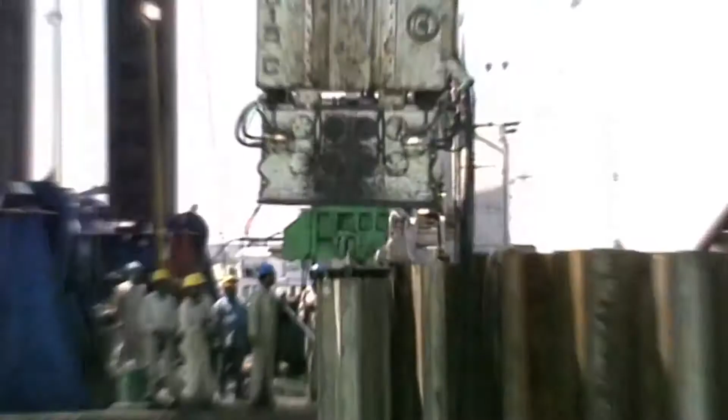Sheikh Mohammed bin Rashid Al Maktoum, Dubai's crown prince, is the visionary behind this amazing building. The project is his response to the economic time bomb his country confronts. As his close advisor, Sultan bin Sulayem knows all too well. He knew that we don't have oil. He knows that oil is going to end someday. And they have two choices: either go and do something about it and find other alternative ways to sustain the life for the people of Dubai, or sit waiting for help.

Only 50 years ago, Dubai was a dusty backwater, home to pearl divers, coastal traders and Bedouin. Then, in the 1960s, prospectors discover oil. The sudden injection of billions of petrodollars transforms the sheikhdom. But geologists predict the oil boom will be over by 2016. The good life could end just as quickly as it began, when the wells run dry.

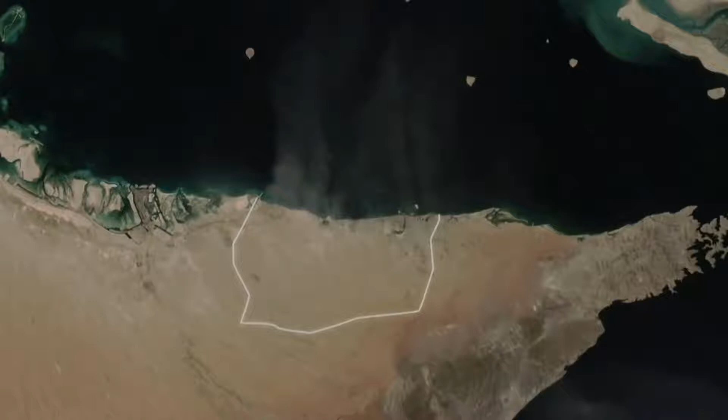The answer to Dubai's economic survival lies in its geography. This tiny emirate, less than twice the size of London, is in the remote Arabian Gulf. But Dubai has three untapped assets: sun, sand, and sea.

Facing future economic meltdown, Sheikh Mohammed makes a crucial decision. He will turn his country into one of the world's most exclusive holiday destinations, a playground for the rich on the Arabian Gulf Coast. The Sheikh needs a luxurious centerpiece to launch his country into high-end tourism. He stakes what some speculate is over $1 billion on the tallest, most lavish hotel in the world, with a unique 7-star reputation: the Burj Al Arab.

I think it was very important to put Dubai on the map of the world. There's no hotel like this hotel. It takes guts, and Sheikh Mohammed has a lot of guts.

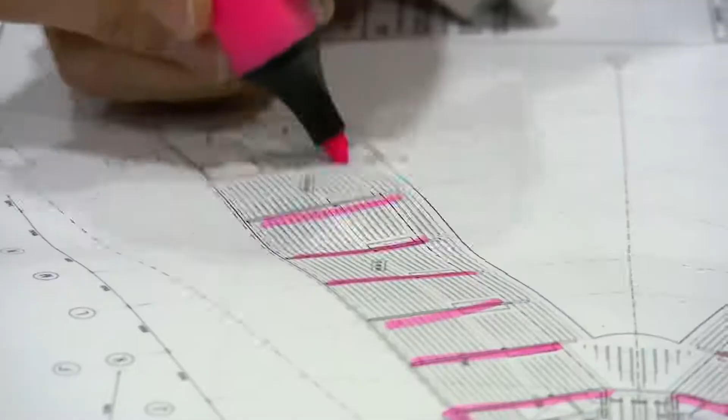The Sheikh's courage is clear from his choice of architects: a radical young team from Britain, brave enough to take up the challenge, but very short on experience. They are led by Chief Architect Tom Wright. We had an average age of 32, not a grey hair between us, and none of us had gone over about 15 stories. I was quite staggered by the scale and the immensity of the project. Tom Wright and his colleagues have a reputation for innovative engineering, but they're more used to designing schools and offices.

But Dubai is a place where connections can make all the difference. Through a contact in the ruler's office, the team gets its break. Sheikh Mohammed agrees to a meeting and is so impressed with their initial concepts, he awards them the contract.

Now Wright must turn his sketches into a design so remarkable, the building becomes a world-renowned landmark. We had many sleepless nights worrying that the building we'd designed wouldn't turn out to be at all iconic. Wright knows he must push his design to the limits. A building only becomes an icon when its form is simple but unique.

We decided that if you could draw a building simply with a few strokes of a pen, and it was instantly recognizable as not only the building, but the place - Dubai, in this case - you'd created something that was iconic. So if you consider these buildings in the world, there are probably no more than 10 maximum that have actually achieved this status: Australia, Sydney Opera House. As with all these buildings, it's usually just the first couple of lines that actually make you know exactly where the building is. Paris - and you have to put a flag on the top.

Can Tom Wright and his team compete with the likes of Gustav Eiffel? This is a once-in-a-lifetime challenge. All the brainstorming pays off when Wright finally has his eureka moment. We were sitting there having a beer, watching the modern sailing yacht come out of the Dubai Offshore Sailing Club. You think of excitement, you think of exhilaration, and we went, hey, this must be the one.

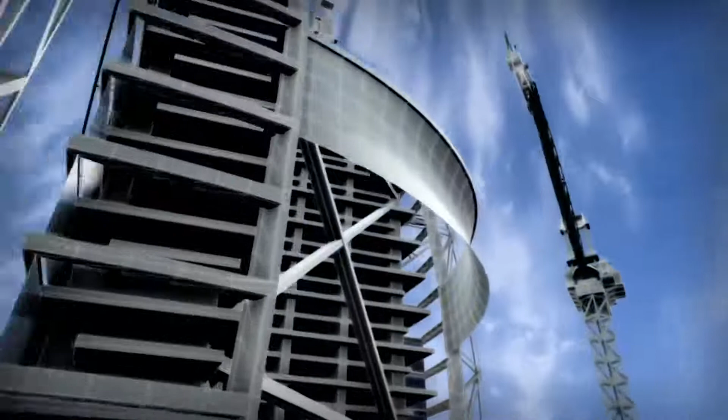Constructing the hotel out at sea will significantly add to the risk and cost. Can Wright persuade his colleagues this radical scheme will work?

I remember I was pulling the sail out to sea, and the rest of the design team were pulling the sail back onto the shore, and this continued to go backwards and forwards before finally the client stepped in and said, no, it's going to be out at sea.

Sheikh Mohammed is prepared to take the risk. The hotel will be built 270 meters off the coast. No one has ever built a skyscraper this high on an artificial island. This 321-meter structure, weighing 250,000 tons, will need to stand firm against earthquakes and Gulf storms.

Wright has won the first of many battles. The Burj will rise out of the sea. But time and again, his refusal to compromise will force his colleagues to push the boundaries of engineering to the limit.

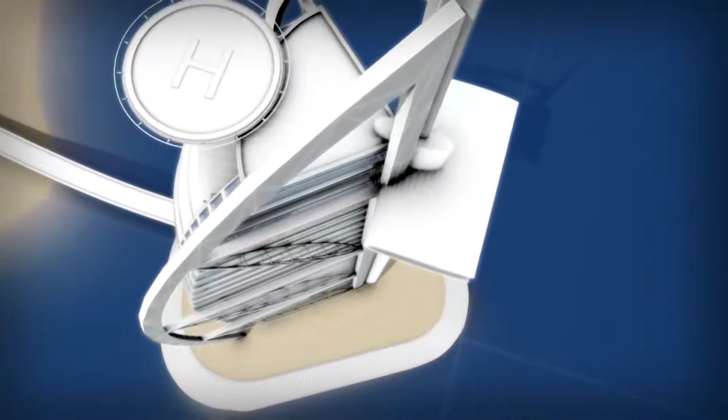By early 1995, the construction team is hard at work on Phase 1, building a low-lying island. But the inexperienced architects are about to get a taste of Dubai's extreme weather.

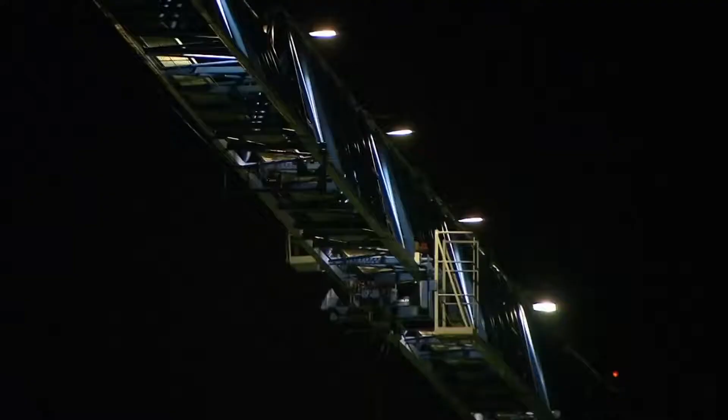April the 27th, a powerful storm known as a shamal sweeps across the Gulf, hitting the coast with a vengeance. A set of construction barges lie in its path. Each is laden with 10,000 tons of rock.

The architects have planned for all weather conditions, but the storm's intensity still shocks Simon Crisp. We had 3 or 4 meter waves bashing onto the beach. To see the waves coming in like this was really quite a wake-up call for us.

One huge barge breaks loose and slams into the mainland. The team realizes the damage this kind of storm could inflict on their island hotel. We had a really graphic example of how powerful the Gulf of Arabia can be when it's angry. The architects' decision to expose their structure to these forces could have serious consequences. The engineers will have to struggle to produce a low-lying island capable of resisting nature's fury.

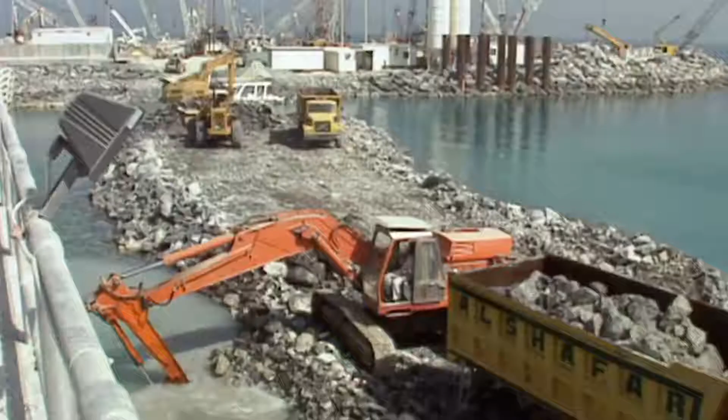The man-made island for the world's tallest hotel has hit a critical stage just 5 months into the build. Dubai's Sheikh Mohammed is depending on this project, the Burj Al Arab, to convert his country from oil producer to top-class tourist destination.

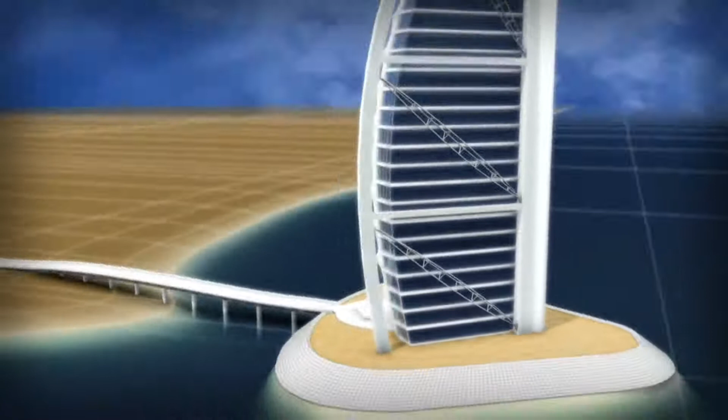But a debate rages over the island's height. Architect Tom Wright wants to make it low to give the impression of a sail rising out of the water. We argued a lot about the height of the island. From a design point of view, I wanted people to be close to the sea.

From the start, he's gone head-to-head with engineer Mike McNicholas, who's responsible for the island's safety. So I wanted the island as low as you possibly could, you know, skimming the sea. I'm coming from the other end, needed to make sure we were protecting the island.

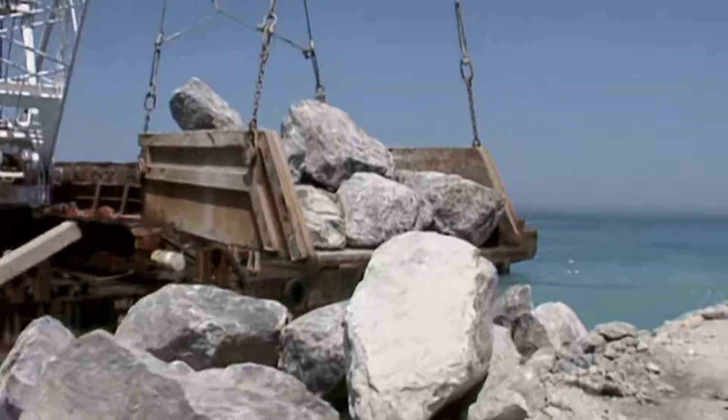McNicholas's worst fear is that waves breaking over the island could damage the hotel or even drag guests into the sea. Initially, the engineers planned to build the island using rocks. They are available locally and the technology is proven. But Wright rejects this. A rock island would have to be far too large to repel the sea safely.

To keep the island low, McNicholas experiments with pioneering concrete blocks designed to reduce the impact of waves. But no one in the Gulf has ever used these blocks before. I had to insist with the team that we carried out tank testing. It was the only way we were going to be sure that the island would be safe.

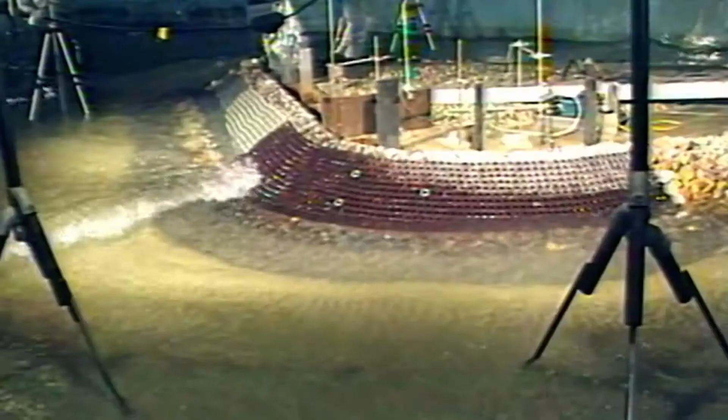These tests replicate the power of the tallest waves that can occur once in 100 years and sends them crashing into a series of differently configured models. 3 weeks of testing prove the hollow blocks will work.

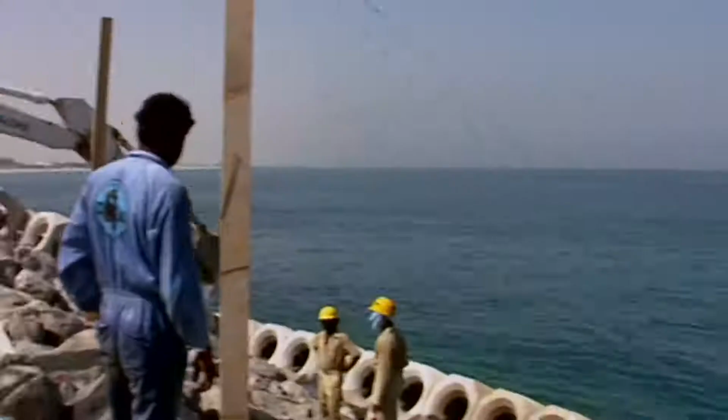The construction team builds the island with steep rock slopes, then covers them in concrete armor to absorb the force of the waves. These ingenious blocks work like a sponge. As the wave hits, the water passes inside the space and turns around on itself. The force is largely dissipated.

With the engineers' help, architect Tom Wright has won his battle for a secure island that rises only 7.5 meters above the waves. Now the team begins the second stage of construction.

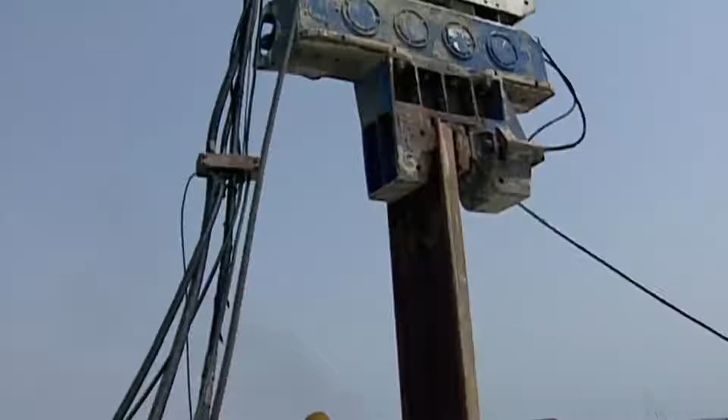In the center of the island, construction workers drive huge lengths of steel 20 meters into the ground. This creates a triangular steel wall known as a cofferdam, which will become the outside of the hotel basement once they excavate the sand from inside.

But removing the sand could be dangerous. That was a real challenge for us. It's sleepless days and nights, 7 days a week, working out how we were going to stop the seawater coming into the structure, how we were going to stop the seawater coming around our structure from beneath and flooding it.

The weight of the sea is a huge force on its bed. This pressure forces water through the sand and threatens to flood the artificial island from beneath.

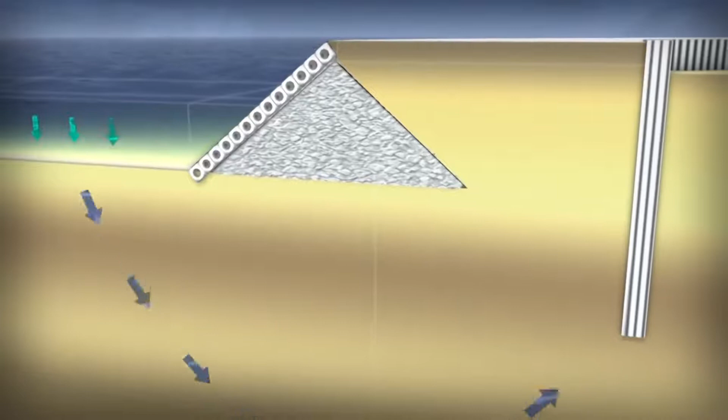To keep the sea out, McNicholas injects liquid cement into the sand to seal off his steel wall from below. But as the sand is removed to form the basement, there's less and less weight to hold back the force of the sea. The cement seal is going to be tested to the limit.

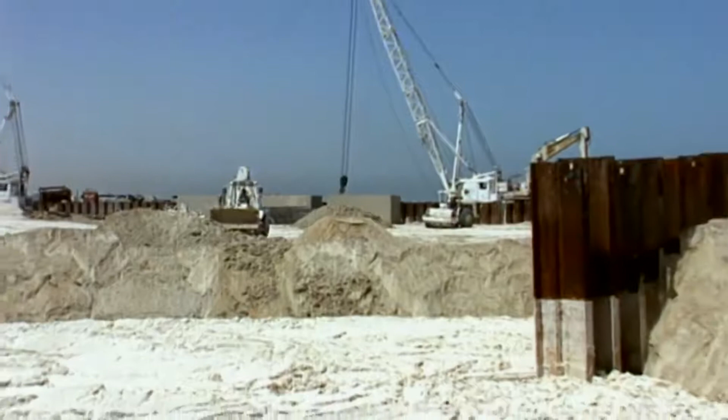In the worst case, the pressure caused by that water movement could have blown the whole bottom of the excavation like a champagne cork.

If McNicholas's calculations are wrong, the excavation could be swamped, killing hundreds of workers. But he stands by his design. With the cement seal in place, the excavators begin to remove the sand.

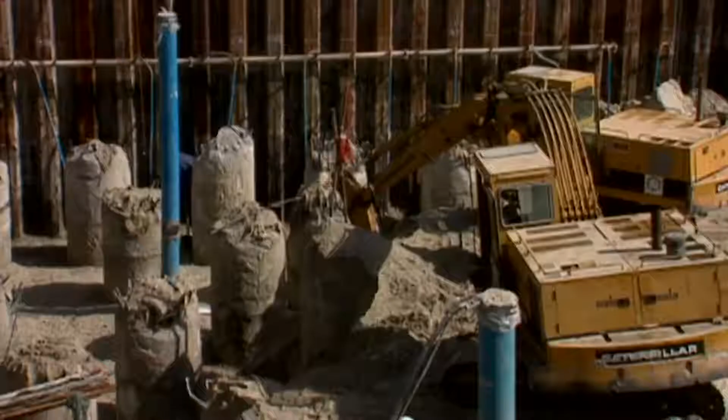As the man responsible, he's not going to let the workers face the risk alone. I felt I had to be one of the first guys down at the bottom of the excavation, looking up 10 meters above myself, thinking, each side of this cofferdam is 7,500 tons of sea pressure pushing in.

When put to the test, both wall and seal hold firm. One of the probably proudest moments of my career was being stood on that excavation and looking around and seeing the steel wall there surrounding me and thinking, we are holding back the sea. My design worked.

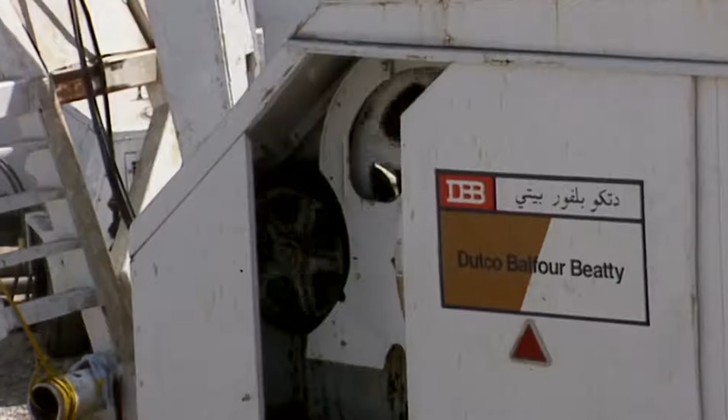November 1995. The artificial island for the tallest all-suite hotel in the world is now complete. The construction team starts phase 3 of this one-off project, the foundations. The support needed for any skyscraper is vast.

But the location of the Burj Al Arab presents an added challenge. It had never been done before to build something like this on reclaimed land. We're talking about a 300-metre high tower on a man-made island in 6 metres of the Arabian Gulf.

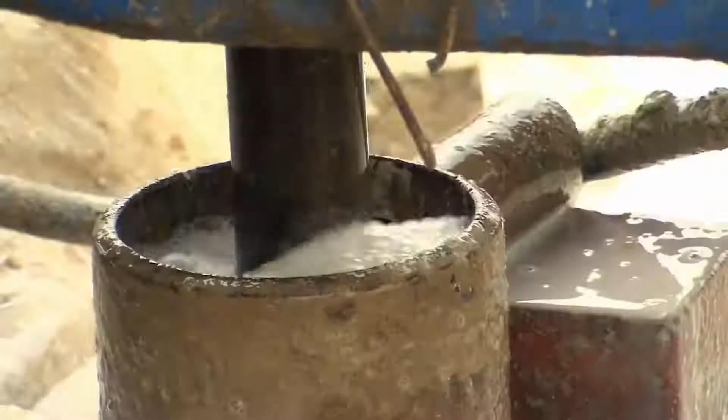The problems multiply when the results of earlier core tests reveal bad news. The team searching for bedrock drilled deep into the seabed, but even a full 180 meters down, there was no solid rock. This will make their job tougher, but the architects remain defiant.

The average person would think we're crazy to build something like this on sand, let alone out in the water. How will this 300-meter structure stand firm against earthquakes and winds of close to 150 kilometers an hour when its foundations depend on nothing more substantial than sand?

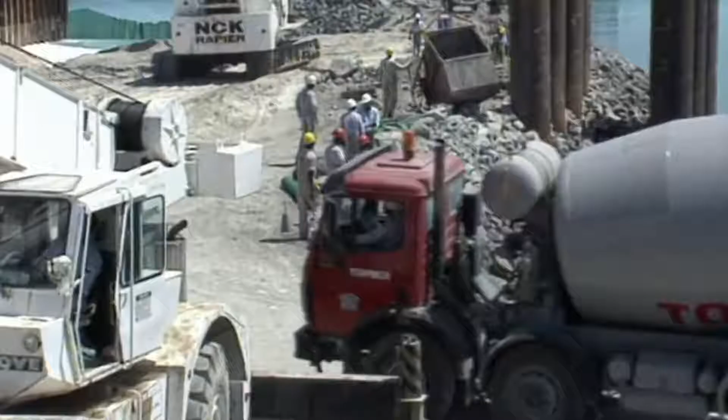On an artificial island 280 meters off the coast of Dubai, construction workers are preparing the ground for the tallest hotel in the world, the Burj Al Arab. But there's no bedrock beneath the site to support the foundations for a skyscraper.

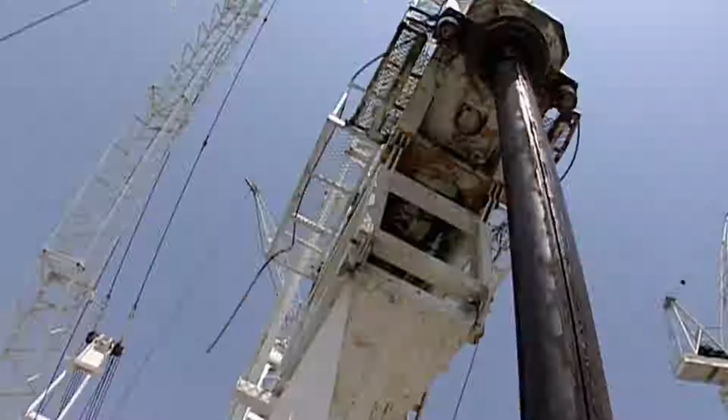The architects have a plan. They want to support the Burj using steel-reinforced concrete foundation piles drilled deep into the sand. So what's to stop the whole structure from just sinking? They are relying on an effect known as skin friction, the resistance that stops two rough surfaces slipping past each other.

Skin friction is all about the contact between the sand and the surface of the pile, and the longer the pile, the further in the ground it is, the greater that effect. I'm going to demonstrate it now by whacking it in. You'll see it starts to move quite quickly with the first few impacts. Now it's starting to stiffen up a bit, even though I'm not hitting it any harder or softer, and the skin effect is starting to really kick in here.

Once the friction between the post and the sand around it equals the load of the hammer, the post comes to a halt.

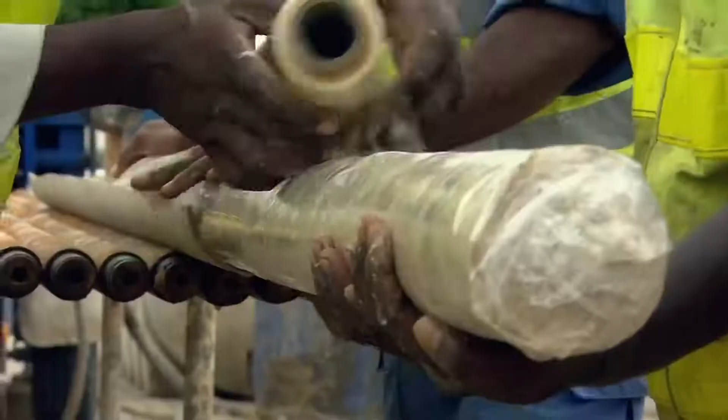The scheme will only anchor the Burj if the sand is compacted enough to create resistance around the building's piles. The drillers pack sand samples into sealed containers and send them off to be analyzed. If the results show the sand is too loose, then support on the piles anchoring the building could suddenly fail.

The geography of Dubai gives everyone reason for concern. It lies within range of a major fault line, so this soaring megastructure could be vulnerable to earthquakes.

In June 1964, a 7.5 magnitude earthquake hits Niigata in northern Japan. Because the area is built on sandy silt, the tremors flip over entire apartment buildings.

This isn't normal earthquake collapse. It's a devastating phenomenon known as liquefaction. As grains of loose sand shake, they fill up any air pockets and compact, taking up less space. The ground stops behaving like solid earth and acts like a liquid. On shifting sand, any building could simply topple.

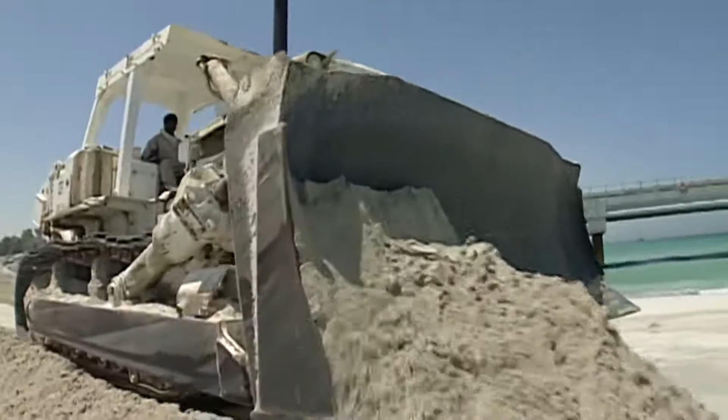When the results of the drilling tests return, it's good news. Deep beneath the site, they find compacted and calcified sand. Liquefaction is not a threat. But will the foundations be long enough for the skin friction to hold them firm? We weren't going to take any chances, and we extended the piles by another 8 meters.

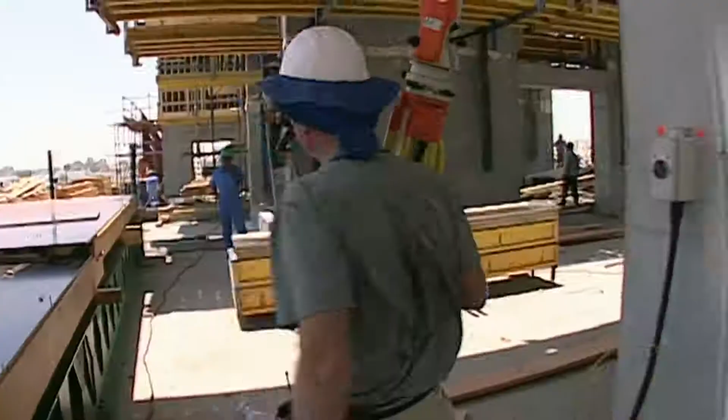One by one, the engineers are solving the challenges thrown up by this extraordinary structure. But in 1996, they brace themselves for a new set of obstacles as Phase 4, the construction of the hotel itself, begins.

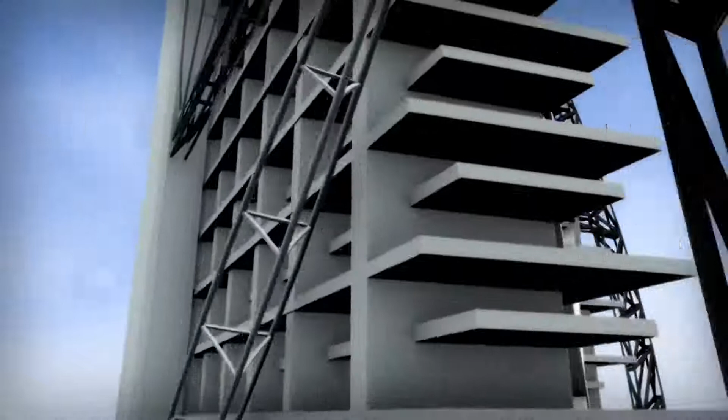This building had to stand up to the worst that the Gulf could throw at it. The hotel itself has slender concrete walls, not capable of withstanding the elements alone. To hold them firm against high winds and earthquakes, the architect devises a visually stunning solution: a gigantic steel structure outside the main building, known as an exoskeleton. A series of vast diagonal trusses tie two huge steel bows to the concrete core at the back of the building.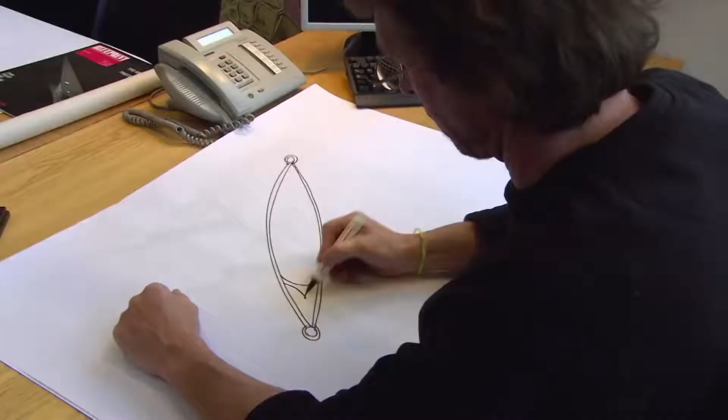Wright's design will make the building unique. But his giant diagonal trusses will make life hell for Anthony McCarter, the engineer who has to make them work. Those trusses gave me 4 months of heartache, sleepless nights, worries, anxiety. They must be incredibly strong to tie the exoskeleton together. But aesthetics are just as vital. It was critical that these diagonals were very, very elegant and also very beautiful as they're so visible.

This building has to wow the world and make Dubai a must-stop destination. Wright's not about to compromise. I used to go to Tom with option after option. I remember one particular occasion where I had 7 options and he went, no, no, no, no good, no good, no good.

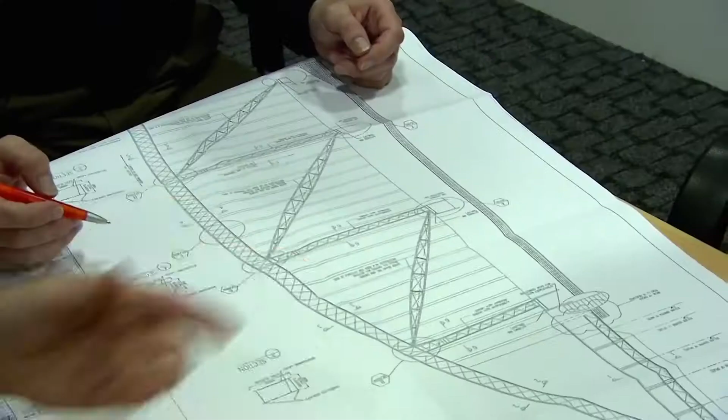Eventually, McCarter finds a form that works structurally and is graceful enough to fit Wright's vision. But this in turn causes nightmares for Malcolm Murphy, the chief contractor. It's okay for the architect to draw pretty pictures, but we have to build it.

He finds a factory just 15 kilometers from the construction site capable of welding the huge diagonals. Each one is longer than the Airbus A380 Super Jumbo and heavier than 20 double-decker buses. Welding these complex forms in the factory is the easy part. Transporting them to the site is not. With each truss weighing in at 165 tons and reaching a staggering 85 meters in length, it's no easy task.

And the challenge is to do that. It's just unbelievable. No one has ever transported anything this size before in Dubai. But Murphy's not going to be beaten. He brings in one of the world's largest heavy lift transporters, a beast with a total of 80 wheels. It makes the slow journey to the construction site at an average speed of around 6 kilometers an hour. Police must close roads and remove traffic lights to allow this convoy through.

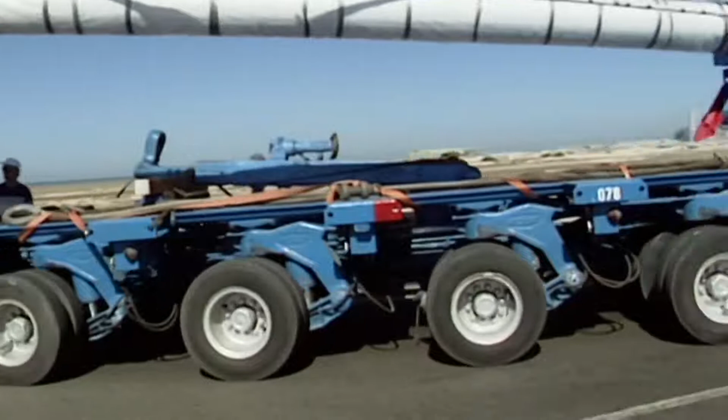When they finally reach the site, the contractors face their next hurdle. These 165-ton beasts have to be lifted into position. The architect refuses point blank to position these things in 3 pieces, which we wanted to do originally. And he said, no, aesthetics, I'll not let you weld up there.

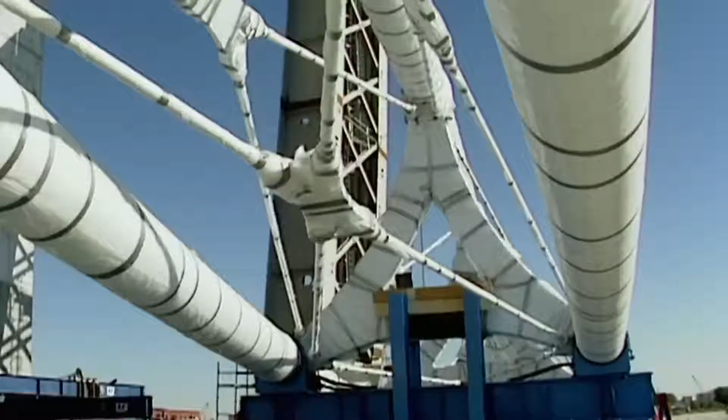He has to find a way to lift the trusses in a single piece to a height of almost 200 meters, twice the height of the Statue of Liberty. We had to go away and think of an idea how to actually lift these monsters up. We had 3 big monster cranes in there, and even they weren't big enough to lift the diagonal trusses.

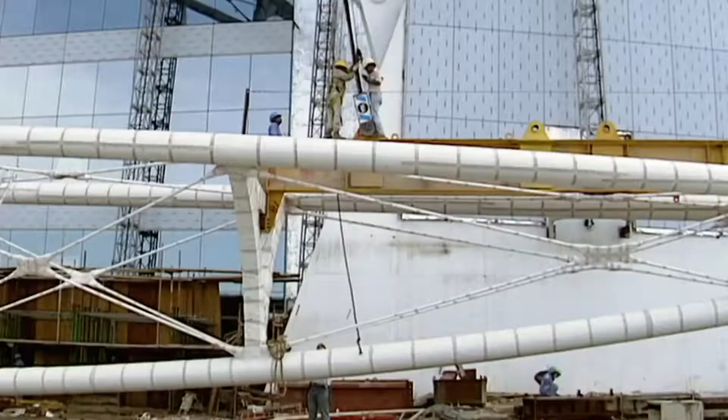Murphy must look further afield for a solution and brings in specialist lifting gear from Singapore. His team sets up winches, like those used on offshore drilling rigs, high on cantilever frames 15 meters from the building. Cables with a breaking strength of 225 tons are attached to the end of the truss. I can assure you we were very, very nervous that morning when we lifted the first one. 30, 40 guys had sleepless nights that week, getting ready for that first lift.

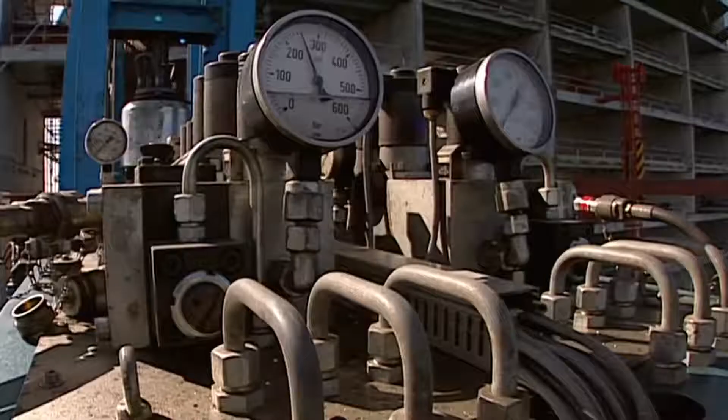The two massive winches take up the strain and painstakingly raise the diagonal truss little by little up the side of the building. It's all going to plan. Murphy and his team have solved the lifting dilemma, but these trusses have a sting in the tail. They need to fit into place with pinpoint accuracy.

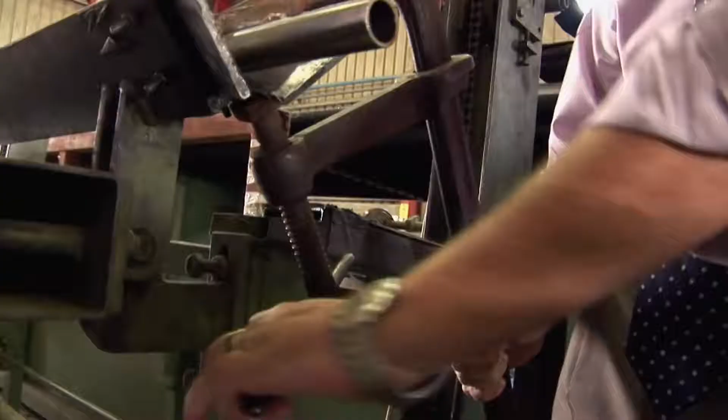But Dubai's climate means temperatures can vary by as much as 14 degrees in a single day, and this will make the trusses expand and contract dramatically. The problem's known as thermal expansion. The steelman's nightmare in the desert, working at 50 degrees C. Steel expands in the heat and contracts when cold.

Okay chaps, light up. We're actually going to heat the steel up now, which is going to give you an idea of what temperatures we're working in the desert. Heat makes the steel molecules move faster and further, and this 15-meter tube actually grows in length. The difference is visible. What did I tell you? Steel does expand with the heat.

The diagonal trusses on the Burj Al Arab could expand and contract by a full 5 centimeters over a 24-hour period. They will never fit their precise point in the framework without an ingenious solution.

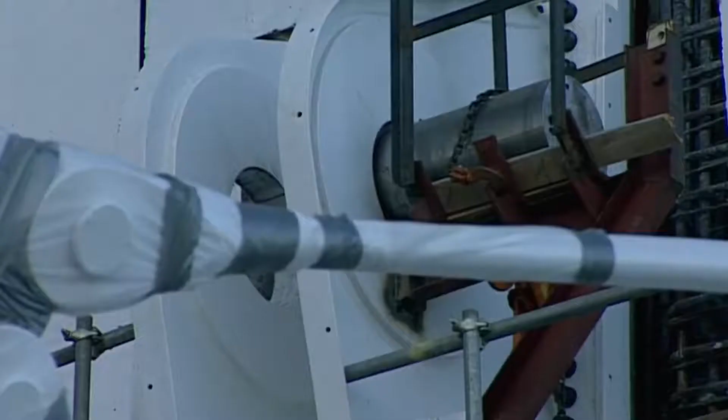The engineers thought about it, the structural fabricators, the steel fabricators, the architects—everybody thought about it, and it was actually one of the architects who came up with this great solution.

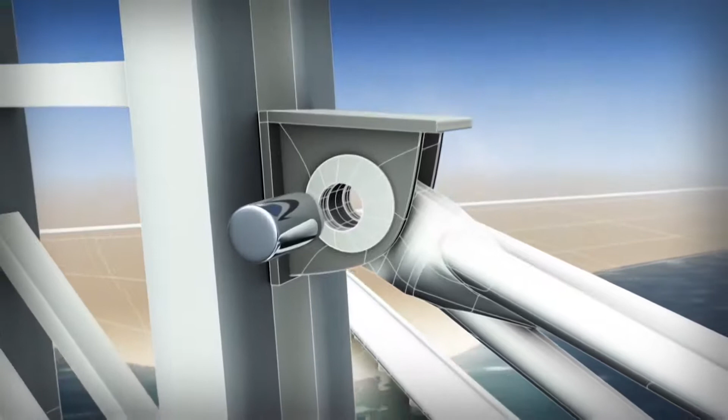On the frame of the structure, the fixing bracket contains a vast washer with its hole offset from the center. This swivels until it lines up with the hole in the diagonal truss. Then the cast steel pin, about 30 centimeters in diameter, is inserted through both holes, locking them together. This clever device buys the team the crucial 5 centimeters of play they require for the installation, and the truss is now fixed securely in place.

When we got that pin in, we had those champagne corks flying. It was just unbelievable. But there's precious little time for celebration—the first VIP guests will arrive before the millennium. This leaves the team less than 36 months to complete the entire project.

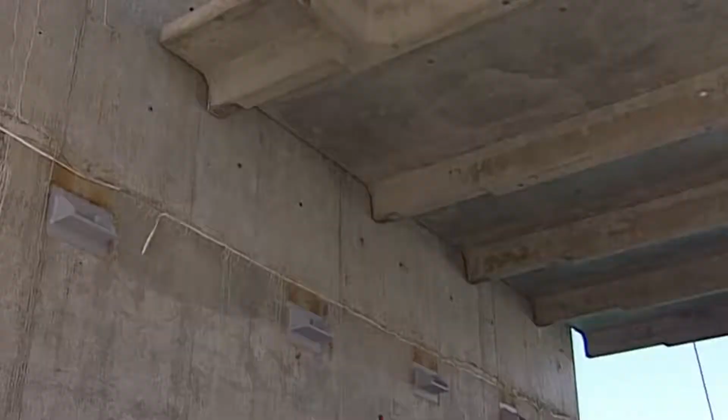Sheikh Mohammed's vision for the Burj Al Arab meant that it was needed yesterday.

January 1997. A colossus is emerging out of the Arabian Gulf. The Burj Al Arab is to be the tallest hotel in the world, the last word in luxury, and a proud symbol for Dubai.

Architect Tom Wright wants the building to be beautiful. The steel sections of the exoskeleton that will support it must be as minimal as possible.

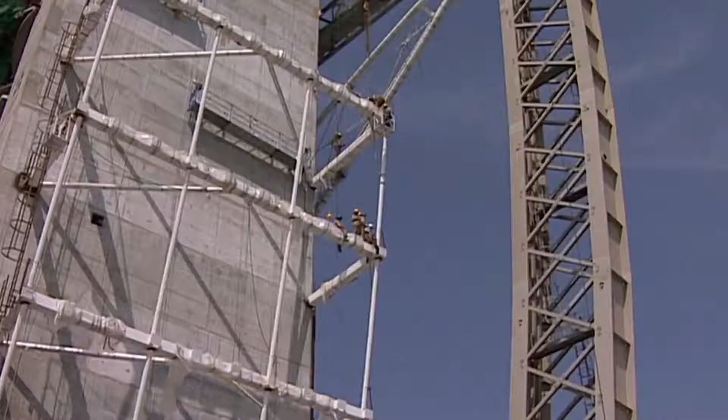The view from these $2,000 a night suites will have to live up to the price tag. When you're in the suite, looking through the windows, they are right in front of you, so they have to be exceptionally well detailed and well put together.

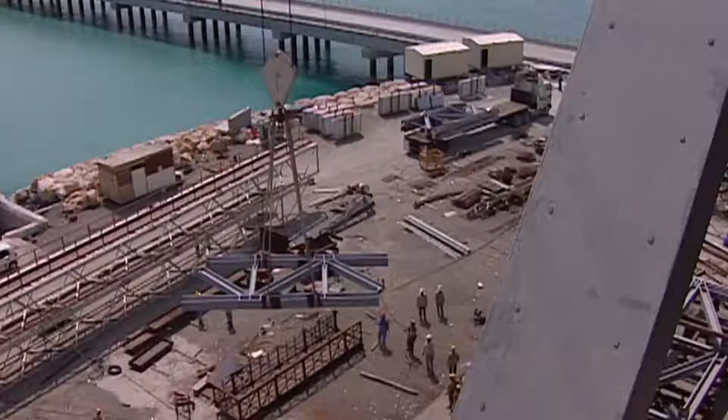But this creates a dilemma. If Wright makes the exoskeleton too light, the wind's force at 300 meters above the Gulf could shake the building apart. Too bulky, and the elegant form of his yacht-shaped structure is ruined. Once again, Wright and the engineers, who must make his hotel safe, are on a collision course.

When you're designing a building that is taller than the Eiffel Tower, and you've never done one before, you want to make sure that you've got it right. This structure is so unusual.

For the first time in Dubai's history, engineers decide to do tests in a wind tunnel. Wind engineer Volker Buttgereit knows the Burj Al Arab is one of a kind.

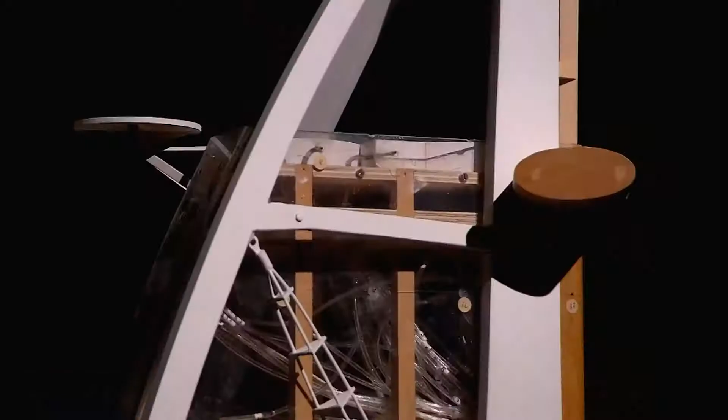Before this building came along, most of the buildings in the Gulf were fairly orthodox shape—square, rectangular, nowhere near this scale. So doing a wind tunnel test for a building in those days in the Gulf was almost outrageous. But for this extraordinary structure, it's essential.

The wind tunnel throws up results that could threaten the entire exoskeleton. When we first saw the design, there was immediate concern about vibration due to something called vortex shedding. Vortex shedding is an engineer's nightmare.

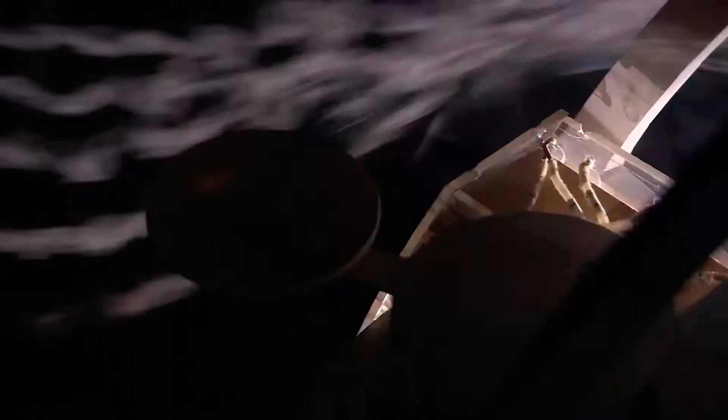Certain wind conditions blowing over sharp edges on the steel structure can create miniature tornadoes. These set up dangerous vibrations that can shake a building to destruction—which is exactly what happened to these massive cooling towers in Ferrybridge, Northern England, in 1965. The engineers must find a way to protect the Burj Al Arab.

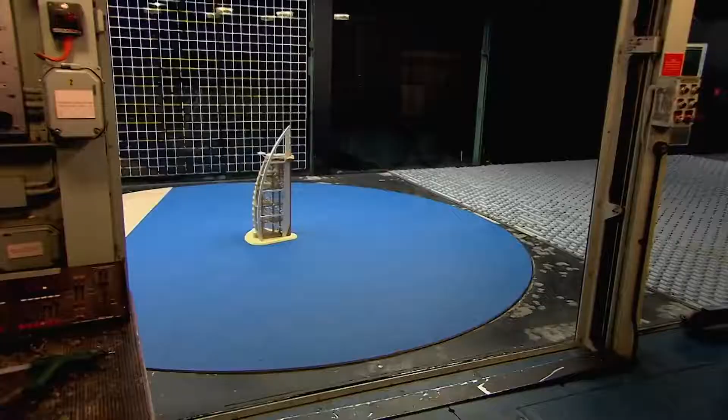The simplest solution is to change the aerodynamic shape, but that upsets the architect. The architectural idea of the exoskeleton structure is, when you look at it, the very essence of the building. If you take it off, it's just another building. If you put the exoskeleton structure on, you have an icon. The engineers need to think again.

This is classic vortex shedding. We realized we had to come up with something clever that was not visible, but somehow reduced the motion.

They turn to an ingenious hanging weight called a tuned mass damper. These are installed at vulnerable points in the exoskeleton. When the wind blows and vortex shedding starts to create dangerous vibrations, the 5-ton weight will swing instead of the structure and damp down the vibrations to well within safety limits.

11 of these systems are fitted from the top of the 60-meter mast all the way down through each of the steel bow structures. These dampers safely cancel out the threat.

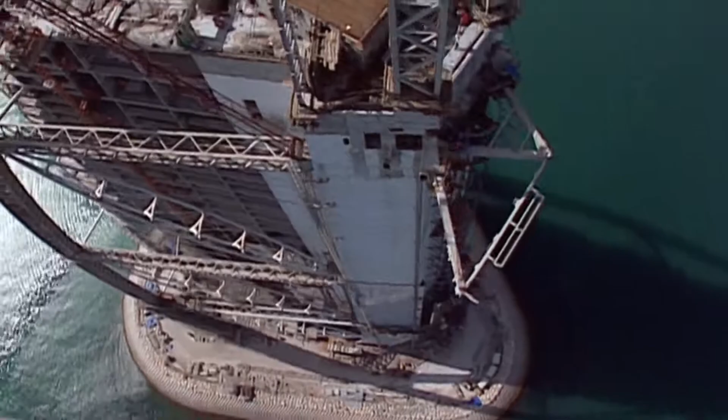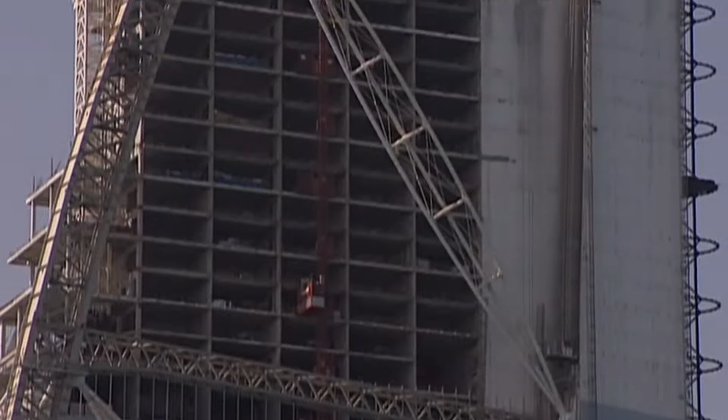June 1997. Dubai is reinventing itself as the luxury tourist destination. This old hotel bites the dust as the Burj Al Arab, the symbol of the new Dubai, approaches its final form. Just 30 months before the deadline, the crew begins constructing the toughest engineering challenge.

Sheikh Mohammed wants the building to amaze. So the design calls for a restaurant that looks as if it's suspended in the sky. I like the idea of the visitor sitting out in space, looking across the view towards the Arabian Gulf and Dubai, and sort of almost floating up in the clouds. The whole idea of hanging out over space would give you a dining experience pretty unparalleled.

The Al Muntaha, or Ultimate Sky View Restaurant, will soar 200 meters above the sea and project nearly 27 meters out on both sides from the building's narrow central core. Once again, Wright's throwing down a gauntlet to structural engineer Anthony McCarter. Can he secure this eccentric wing-like structure with no visible means of support?

When Tom first showed it to me, I must admit I thought he was crazy. This room is actually the size of most buildings, and Tom decided that he wanted to take it and stick it outside of the centre of gravity of the supporting structure. So there it was, dangling in the breeze with only the structural engineer to hold it up. And if the engineers get the calculations wrong, the whole thing could tumble 200 meters to Earth.

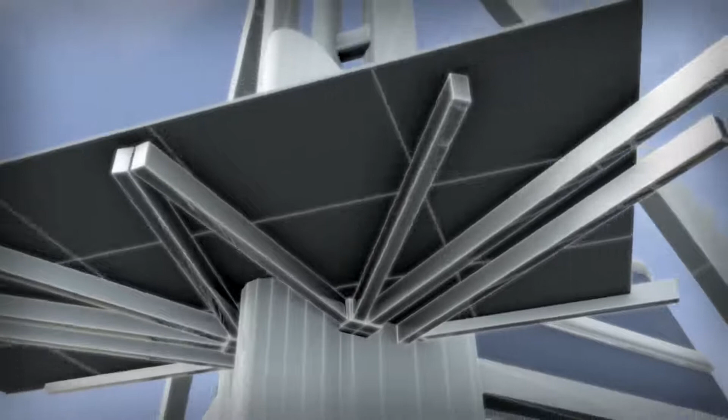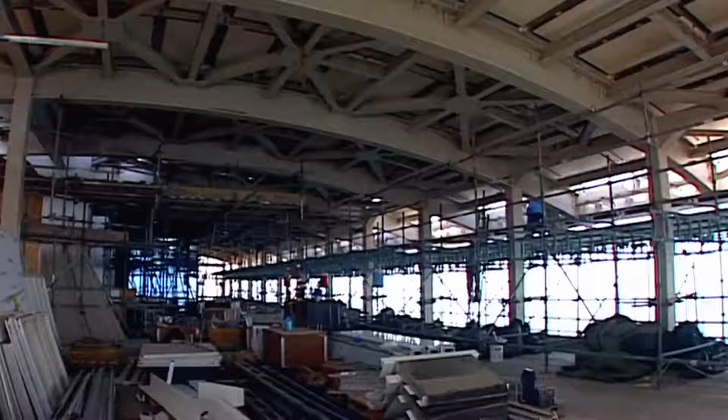McCarter finds a solution to the pull of gravity that pushes conventional engineering to new heights. In the concrete core at the back of the building, he casts a series of steel brackets known as embedments. 10 enormous steel girders radiate off them up to 1.6 meters high. These beams form the base of the rigid steel floor. The wing-like exterior can be attached to it, and then the entire restaurant is enclosed in aluminium and glass. This gravity-defying structure will survive winds of close to 160 kilometers an hour. It's an engineering triumph.

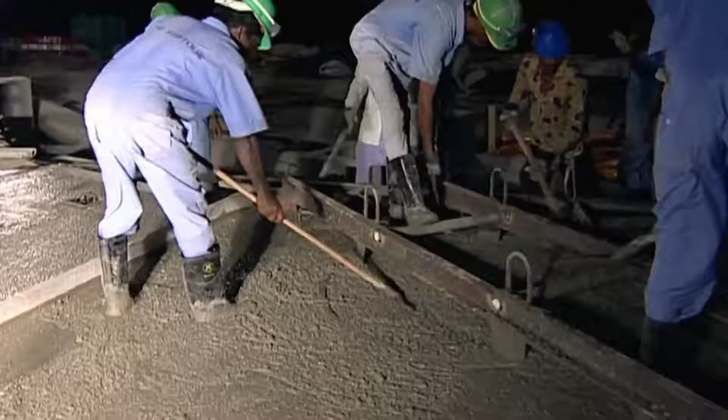But they are just 4 years into the 6-year program. No one can afford to take their foot off the gas. The program was relentless and challenging. 24-hour working, 6 o'clock site meetings in the morning, every morning. You live, sleep, breathe the building. The challenge really was, can we design it and finish it by the original program?

The Burj Al Arab is due to open in time to celebrate the millennium, just 2 years away. The world's media are watching to see if the hotel will be the masterpiece the Sheikh promises, and if the team can complete it on schedule.

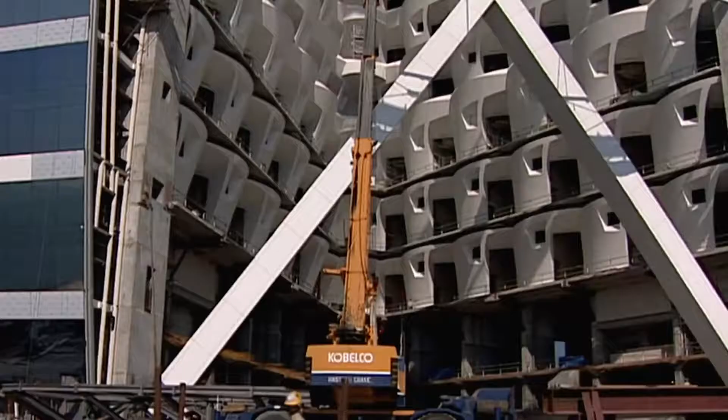The only way to deliver on time is to start the interior decoration long before the exterior is finished. In a temperate climate, this wouldn't be an issue, but humidity in Dubai reaches 100%, and temperatures can soar to a scorching 49 degrees. These conditions simply won't allow the team to fit delicate finishes like gold leaf, silk, and carved wood. If we'd started to put materials that were susceptible to moisture at that time, they would have just fallen apart.

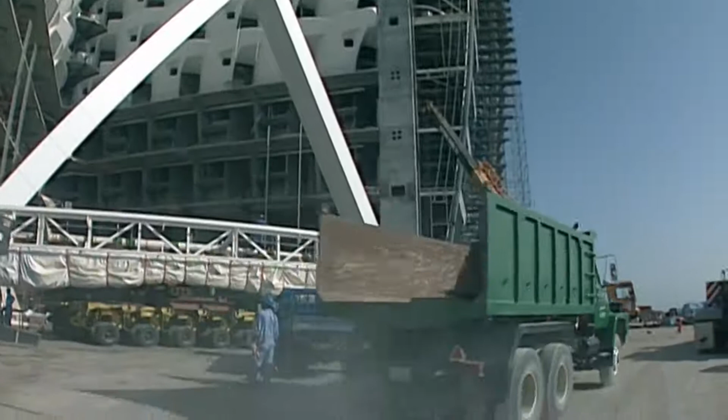To make the deadline, the contractors need to air condition this giant building site and bring the temperature down dramatically. The first step is to enclose the building by installing the final wall, Wright's iconic white sail. But it's going to be tough. When we first proposed the idea of the fabric sail wall, there was a lot of scepticism. People thought that it couldn't be done.

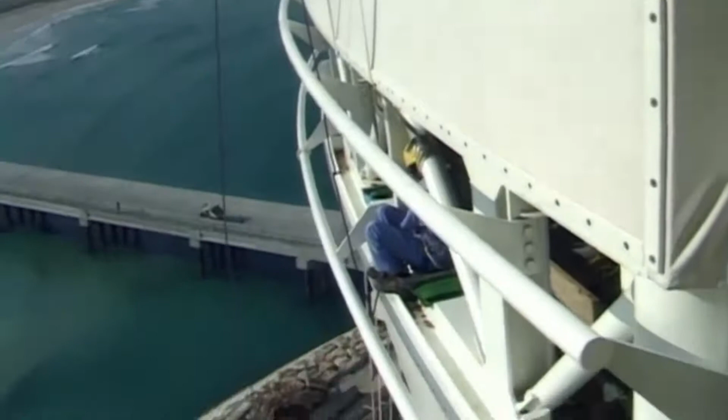They stretch woven glass fiber sections between huge horizontal beams. The surface is pre-coated with Teflon to resist dirt and sand. The result notches up another first for the Burj, the largest fabric wall anywhere in the world. The reflective properties of the white sail will help keep the temperature down.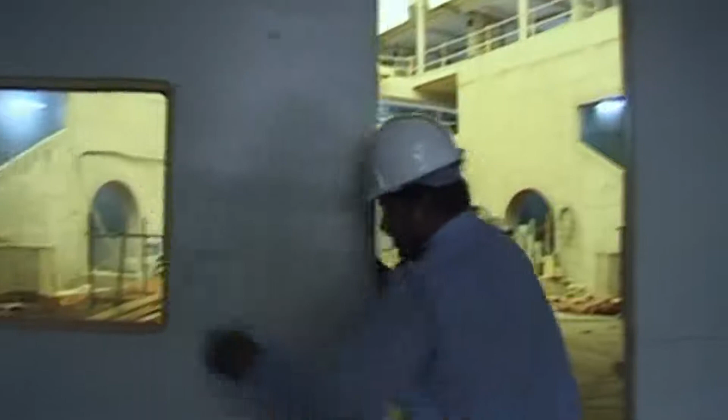But the contractors still need to find a way for trucks to enter the building without allowing in the desert heat. The solution is to install a huge airlock. Trucks drive in, the vehicle pauses as the doors close behind it. A second set of doors then open, and the vehicle moves out of the building.

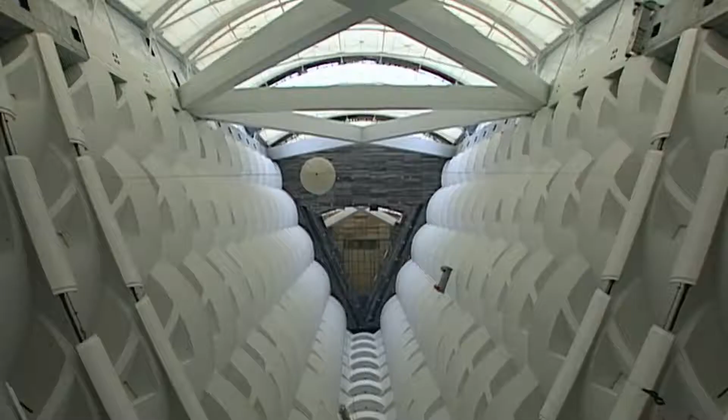The airlock and the sail wall now seal off the building. But cooling a space this large during construction could create a major setback. This unique structure now boasts the world's largest atrium, soaring to an amazing 180 meters.

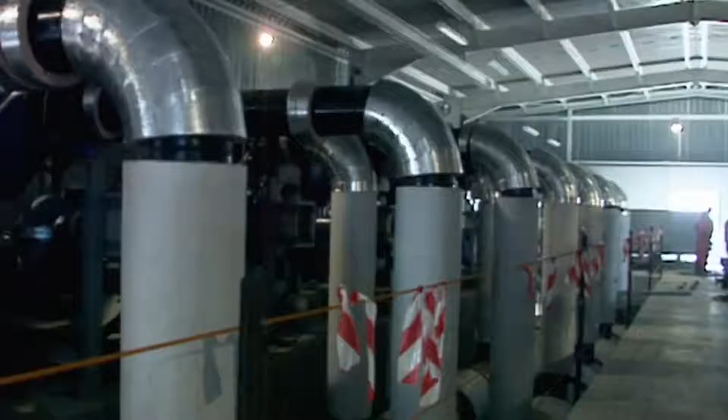All this warm air can hold far more water vapor than cold air. If they cool this hot, humid environment too quickly, they will create uncontrollable condensation. We could have had a rain cloud form at the top of the atrium and create massive damage to the interior design. The only way to avoid rain clouds will cost valuable time.

The contractors switch on the giant cooling system and bring the interior temperature down steadily by less than 1 degree a day. Given the schedule, it's painfully slow. We started to cool the building down in June 1998. By December '98, it was pretty well down to temperature.

At last, the interior decoration can begin. But the hunt for a designer who can create interiors worthy of a sheikh causes further delays.

Khuan Chew, who's already worked for the Sultan of Brunei, knows exactly what it takes to satisfy royalty. It's great news when she agrees to take on the most luxurious hotel on the planet, with its daunting 202 palatial suites and the 180-meter atrium.

But she has just 24 months from design to completion to be ready for the guests booked in for the millennium. I had a very, very tight program. So what we did was that the entire office, all 50 designers, just dropped everything else. And solidly, we just worked on the Burj Al Arab.

She not only faces a frantic schedule, Sheikh Mohammed is expecting her to amaze the world. The brief basically asked us to design something that's never been ever designed before, and that will never be designed ever again.

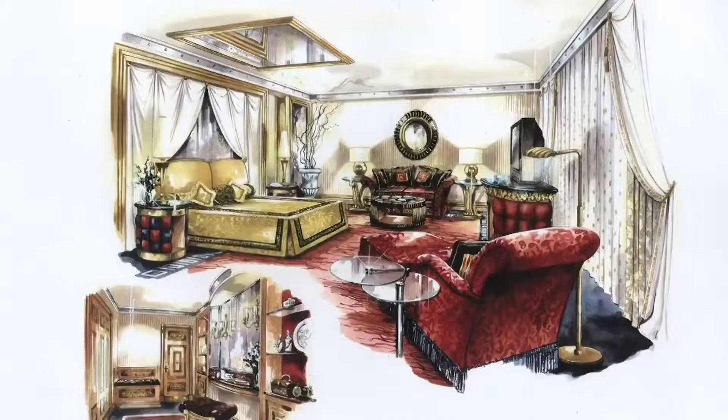Khuan Chew and her team pull out all the stops and begin to produce interiors they hope will match the Sheikh's ambition. But as they struggle to meet the deadline, another more severe problem comes up. The Sheikh wants to offer guests every conceivable electronic gadget in their suite.

This new requirement could have dangerous consequences. A new member of the team is suddenly in the hot seat. Electrical engineer Rob Roos faces the biggest challenge of his career.

There was a total redesign, a total change in the interior design, and that imposed overnight almost a 50% increase in the electrical load of the building.

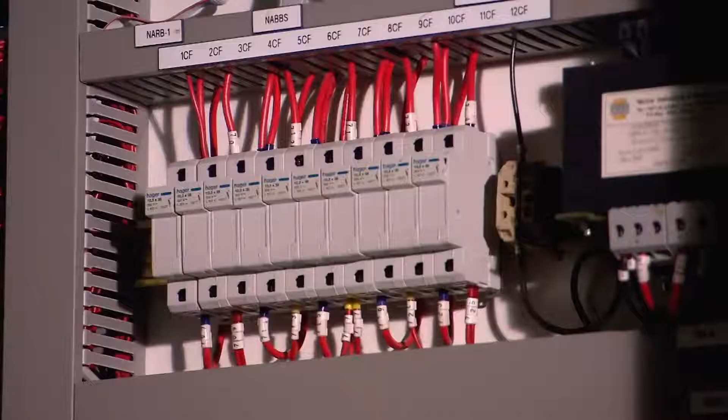The Sheikh's new plans mean each suite requires an enormous 14 kilowatts. That's 8 times the load of a normal European house for every suite. With 202 suites, that's roughly enough electricity for a town of over 6,000 people.

The hotel will have electric curtains throughout, 52,000 lights, most of them on dimmers, and over 5,000 kilometers of electric cable.

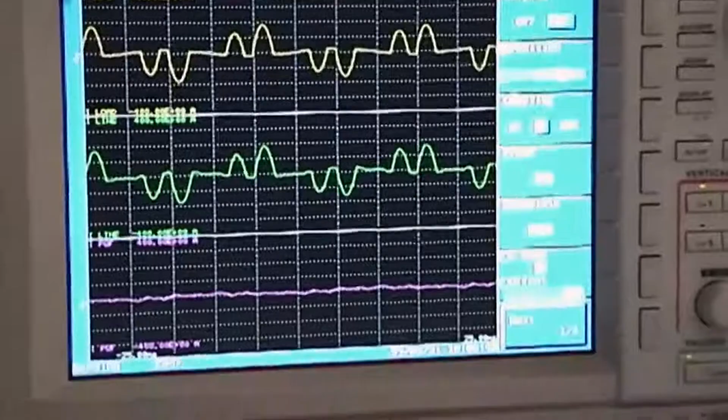All these electronics can scramble the waveform of the electric current and create a problem known as harmonic distortion. This can melt the sheathing around live cables and cause a raging fire.

That was a situation which was just totally unacceptable. We had to deal with that.

The people of Las Vegas know just how lethal a hotel fire can be. November 1980, in the city's MGM Grand Hotel, a pair of electrical wires short-circuit. This causes a blaze that wreaks destruction. 85 people perish in this real-life towering inferno, and over 700 are injured. It's one of the worst hotel fires in history, all caused by a simple electrical fault.

Roos needs a solution to the fire risk, and fast. Obviously, the hotel was under construction. There were some fairly heavy deadlines to try and get the hotel finished and opened, and this was a major change. His response takes electrical engineering to a new level.

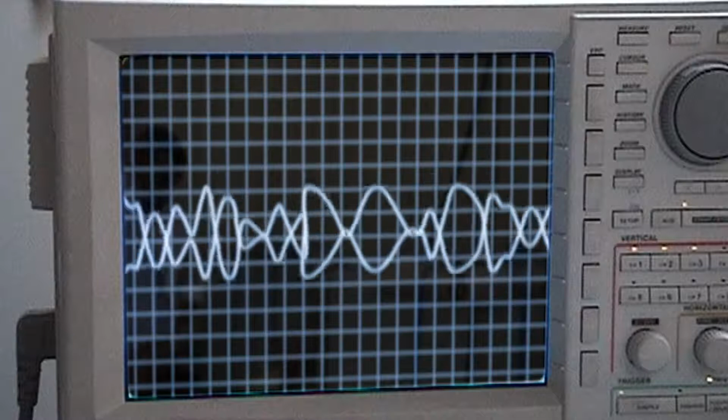He devises a harmonic filter system. First, it detects the electronic distortion, then it sends a current that's the mirror image to cancel it. It's called antiphase and works like noise-cancelling headphones. He installs his filters on key floors and at the point the electricity enters the building.

No one has ever attempted a system on this scale before. This was the largest active filter installation of its kind in a building like this anywhere in the world. A world-class solution for a world-class megastructure.

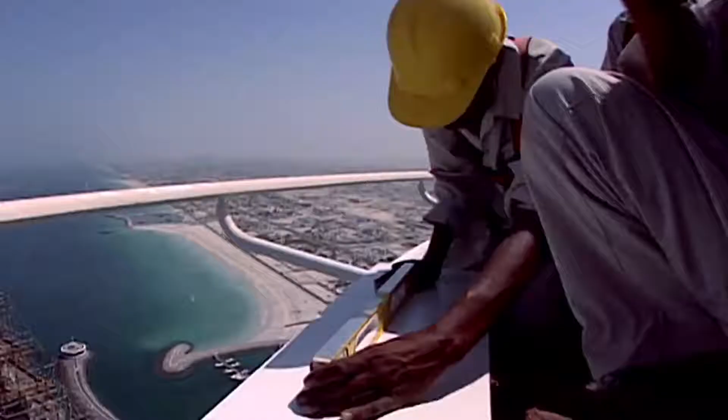The team constructing the Burj Al Arab can claim a string of groundbreaking achievements. They build the first artificial island off the coast of Dubai, construct the tallest atrium in the world, enclosed by the largest fabric wall ever built. And with the mast finally in place, this structure, for now at least, is taller than any other hotel on the planet.

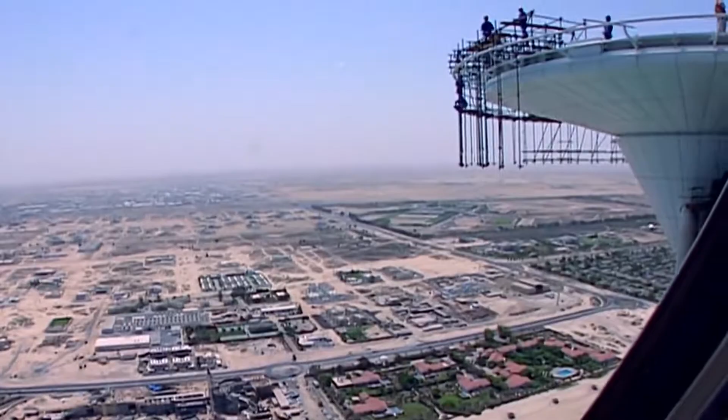Now, five years into the project, the team reaches an important milestone. The iconic exterior is almost complete, but the interior decoration of the world's most luxurious hotel is seriously behind schedule. This stage has always been a race against time. Now Sheikh Mohammed is about to send the design team into a tailspin.

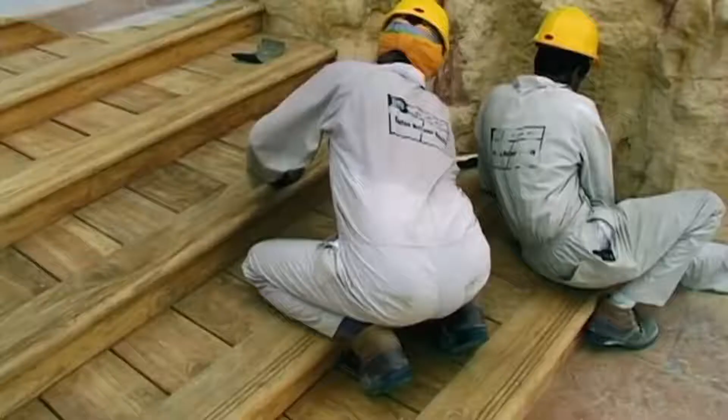Dubai, April 1999. The world's tallest and most opulent hotel is approaching completion. Everyone is rushing to finish the hotel, ready for the millennium deadline.

Interior designer Khuan Chew is still operating in overdrive. Christmas was cancelled, Easter was cancelled, bank holidays were cancelled. We basically made 50, 60-hour weeks.

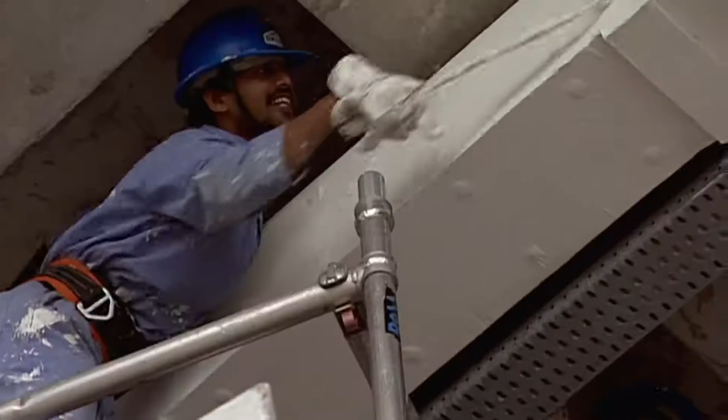But for the world's largest atrium, Khuan Chew makes a radical decision. She goes minimalist, letting the complex architecture speak for itself by painting it all white. The interior decoration is almost back on schedule.

Then comes the moment of truth. Sheikh Mohammed arrives to examine her work and pass judgment. The man behind the whole project is delighted with the ornate styling of the luxury suites. But that's where the good news ends. I was summoned and said, when are you finishing off this atrium? I said, well, it's nearly done.

Unfortunately, the feedback was no. Where's the color? The Sheikh completely rejects the white styling of the atrium. It's just too plain. Not exciting enough, not bright enough, not colorful enough, not rich enough.

Khuan Chew has to completely redesign and decorate the tallest atrium in the world in just six months. I was basically living and sleeping in the Burj Al Arab, rushing from area to area.

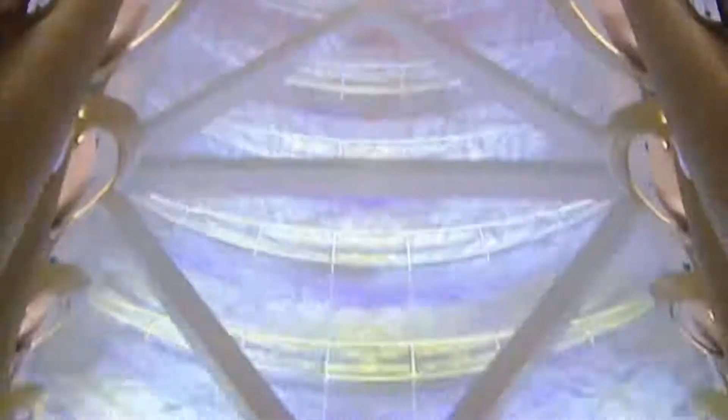This is her last chance to get it right, so she sets out to dazzle. She designs a light show to animate the world's tallest fabric wall. Fountains create aqua gymnastics in the lobby. Vast fish tanks welcome visitors as they ride the escalators. And crucially, she transforms the view up the atrium into a rainbow palette of vibrant colors.

Will it satisfy Sheikh Mohammed? Everyone's on tenterhooks. The adrenaline was pumping, sleepless nights basically before opening.

The Sheikh's response is a definitive yes. He's delighted and signs off on the project. Sheikh Mohammed believes it became almost a six to seven star hotel, and the achievement of his dream, the realization of his dream.

The doors open to the first ultra-rich guests in December 1999, a full month before the millennium. And Sheikh Mohammed comes to watch the final sunset of the century from his magnificent new hotel.

Architect Tom Wright and the team have fulfilled the brief. Every part of this iconic structure is extraordinary.

In the ground floor restaurant, a team of divers care for 700 exotic fish in this 280 cubic meter tank. The result allows guests to get intimate with sharks while they eat.